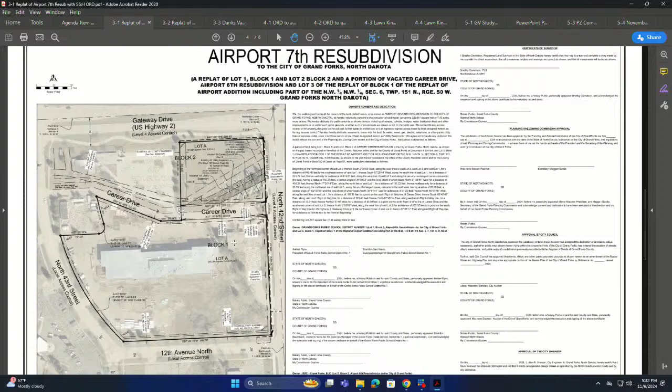All right, Mr. Budke. Yeah, I would just request recusal on this item, number 3-1 and 3-3. In both cases, my employer is the architect of record. Okay, Mr. Reichert. So moved. All right, a bunch of seconds. All those in favor? Aye. All right, Mr. Budke, you are recused. Thank you very much. All right, any more questions for Ms. Grasser? I do have a public hearing.

With that, I'll open up the public hearing. Anybody in the audience like to step up and address 3-1, please do so at this time. Seeing no one, I'll close the public hearing, bring it back to the commission. Mr. Reichert. Move approval. Moved by Mr. Reichert. Second. Second by Ms. Arel. Any further discussion? No hands. All those in favor signify by saying aye. Aye. Opposed, same sign. All right, 3-1 passes.

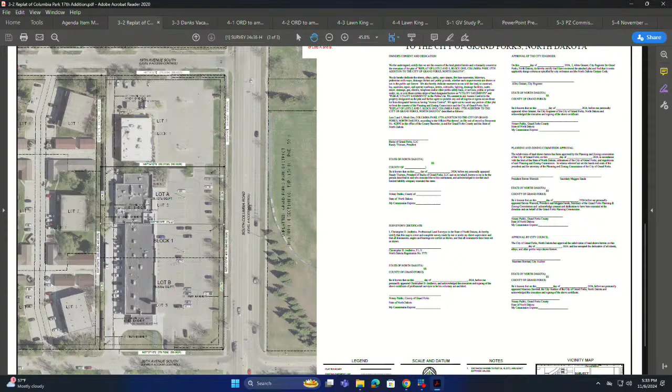With that, I guess I'll open the public hearing. Anybody in the audience want to step up and address 3-2, do so at this time. Seeing no one, close the public hearing, bring it back to the commission. Mr. Reichert. Move approval. Moved by Mr. Reichert, second by Ms. Sandy. Any further discussion? Seeing no hands, all those in favor signify by saying aye. Aye. Opposed, same sign. 3-2 passes. 3-3.

3-3 vacation of right-of-way and easements on lots 7, 8, 9, 10, 11, and 12, Block 1, Danks 2nd Resubdivision, located at 1450 to 1660 South 42nd Street. Ms. Johnson. Thank you. So this request consists of 6 different vacations, one for right-of-way, the rest for utility easements on or near the future site of the Altru Sports Complex, which is to be located along South 42nd Street, right south of the Alerus Center. The vacations are requested to allow for the development of the complex, which will also involve replat requests coming probably first for preliminary review in December.

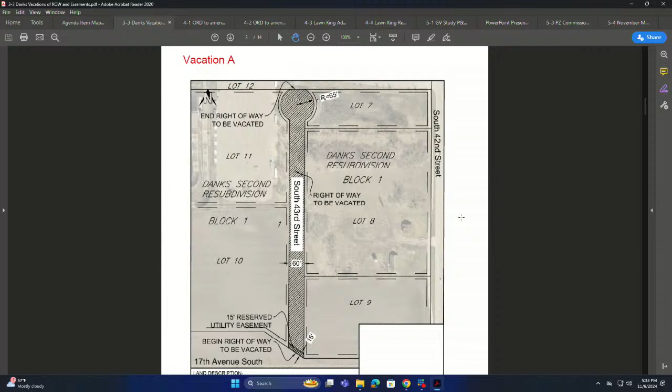We're requesting the vacations ahead of the plat just because of the longer noticing period for vacations. And with that plat that's intended to come next month, necessary easements will be reestablished. So I have ordered these vacations A through F, and I'll just go through the exhibits here. So first, vacation A is for the right-of-way for South 43rd Street. This street has not been paved or installed, so just vacating the right-of-way there. After each map is the legal description for each one. So here's the legal description for vacation A.

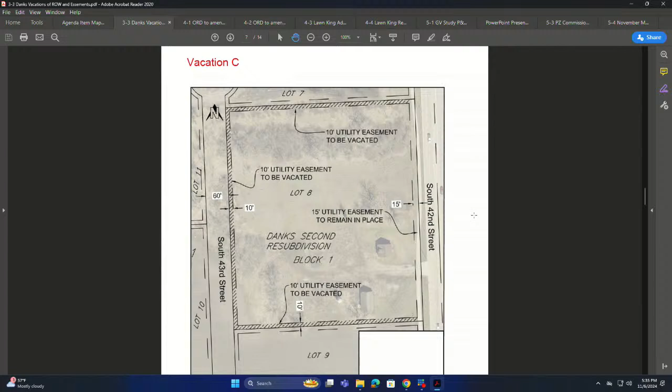Vacation B is for Lot 7, Block 1 of Danks Second Resubdivision. It's for 3 10-foot utility easements, one on the north, one on the west, and one on the south side. Again, the legal description on the second page. Vacation C for Lot 8, Block 1, we also have 3 10-foot utility easements on the north, west and south sides.

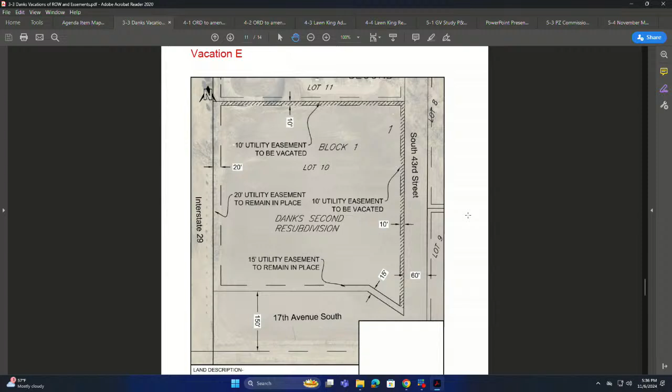Vacation D on Lot 9, Block 1, two 10-foot utility easements vacated, one on the north and one on the west side. Vacation E for Lot 10, Block 1 of Danks Second. We have, again, two 10-foot utility easements, one on the north side, one on the east side.

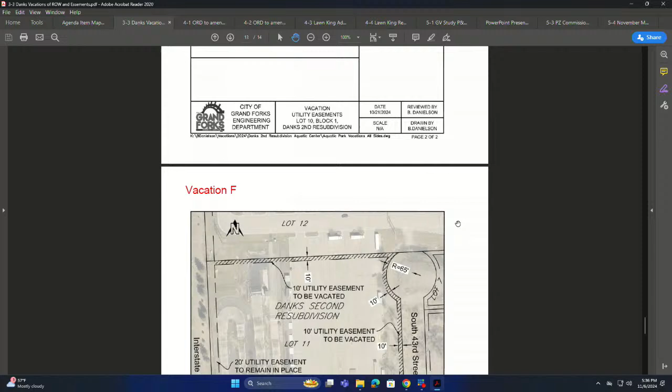And finally, vacation F on Lot 11, Block 1, we have three 10-foot utility easements on the north, east, and south sides. Yeah, those are all 6 of the vacations as part of one request. We kind of just consolidated them all since they're all in the same area. And with that, I'll stand for any questions.

Mr. Akert? Are there no utilities going to that BMX track on Lot 11, Block 1? They're all coming from the north. So we don't need any? Not at this time, but we will be reestablishing because there's going to be another spine coming through that you'll see next month. All right, thank you.

Mr. Mattson? Yes, just to disclose, I am working as the project executive building the Altru Sports Complex, so may need to be recused on this if you feel that way. Okay. No. You're fine. Yeah, you're fine on this.

Okay, with that, I will open the public hearing. Anybody in the audience like to step up and address 3-3, please do so at this time. Seeing no one, I'll close the public hearing, bring it back to the commission. Mr. Reichert. Move approval. Moved by Mr. Reichert. Second. Second by Ms. Sandy. Any further discussion? Seeing no hands, all those in favor signify by saying aye. Aye. Opposed, same sign. 3-3 passes unanimously.

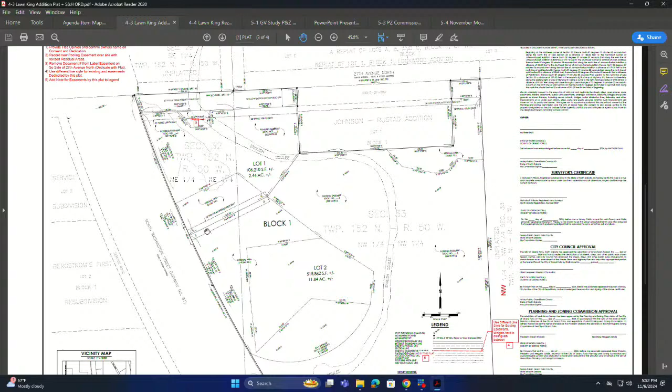Any questions for Ms. Grasser? If you've ever seen that lot, they have a lot to do. They've been working on it. I drive by it every day. Yeah. Mr. Reichert? Move approval. Second by Ms. Sandy. Any further discussion? Seeing no hands, all those in favor signify by saying aye. Aye. Opposed, same sign. Motion passes.

4-4. 4-4, ordinance to amend zoning map rezoning from A1 Agriculture Preservation District to I2 Heavy Industrial for lots 1 and 2, Block 1, Lawn King Addition, located at 2500 to 2600 North Washington Street. Ms. Grasser? So going along with that plat, here are the two lots highlighted. They're looking to go from A1 to heavy industrial. That kind of matches their surrounding in purple here. They will maintain their office shop at the buildings. It'll be in 3 phases, but the original building in phase 1 will be their business shop and offices.

So that fits within the I2. And then they'll add storage in their phase 2 on top of that. But they'll maintain an entrance off of North Washington and have their shop there. And the notices to neighbors will go out after preliminary approval, and that would be 800 feet around. I'll stand for any questions. All right, any questions? Mr. Budke? So with the rezoning, this piece of property, does anybody know, has it ever been in agricultural production? Or it just looks like it's vacant at the moment, but I think it's always been vacant.

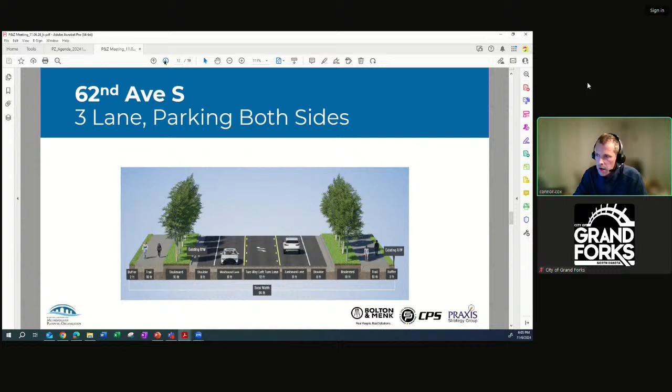I'll also mention that we're just showing you what we call a typical cross-section. It's just basically a slice of what the roadway design could look like. In addition to this, we're developing conceptual layouts. So that's more of a kind of 2D, plan view, top-down view of what that whole corridor would look like. So we're doing both of those. That's a little bit hard to share on a PowerPoint presentation. So I'm going to move on to the next priority focus area.

This was, I would say, kind of the second highest priority from the group from our discussion, and that is looking at South Washington Street, basically from 57th Avenue to the south. So as some of you probably know, 57th was sort of the extent of a recent reconstruction, and the section to the south of there remains mostly a 2-lane rural roadway. So we're evaluating a number of different design options, including 2 lanes, 3 lanes, or 4 lanes in this section, and I'll walk through those now.

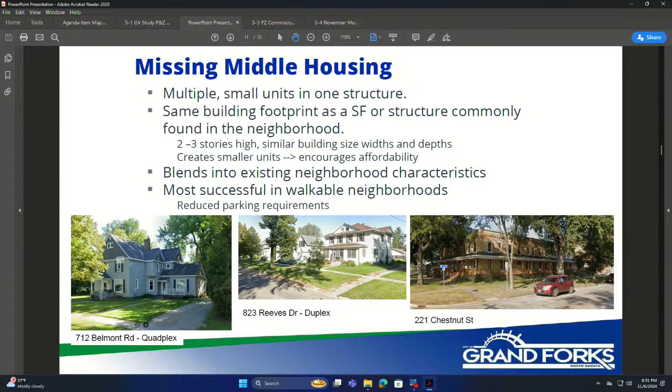AARP North Dakota would be a huge resource for us to tap into. We've had a preliminary conversation with them because they do advocate for missing middle in terms of the aging in place options, ADUs, things like that. North Dakota has an aging population demographic trajectory, and so to try to get ahead of that and start building more senior ready or aging in place things at an affordable rate, they're definitely leading the charge on the advocacy. And so I think there's a handout of this publication on each of your chairs. If there's interest, I'd suggest looking through it.

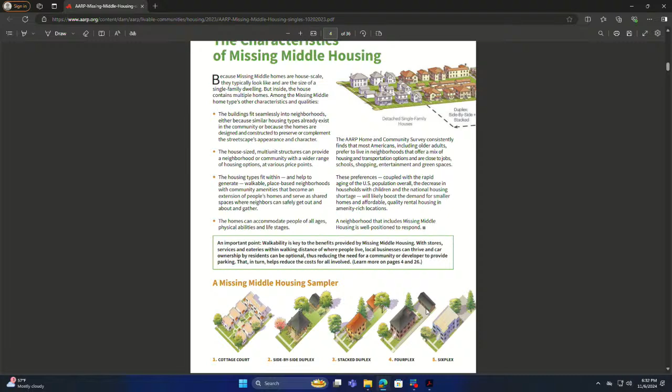I'll just scroll through a couple of different things because they really put together some great examples of what missing middle is and what it could be. And again, it focuses on that house scale that fits physically and aesthetically within an existing neighborhood. This has a great diagram of what those might look like. We don't really have cottage court outside of our townhouse situation, but the sixplex here reminds me of that one on University and 20th, 23rd, something like that. The Harriman Building, I would have never remembered that, but everybody knows the building on University. And so kind of where that missing middle might fit in terms of the scale between single family to large scale apartment complexes.

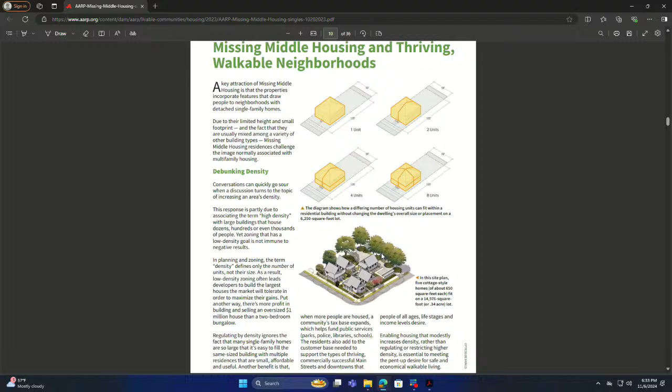It goes through the benefits, again, affordability, reduced transportation because of parking costs, reasons why, as a theme across many cities trying to respond to the housing crisis across the nation. Many are giving reasons as to why they are seeking missing middle and trying to find ways to open up zoning codes to allow them. Distribution of costs, use of existing infrastructure, equity, income empowerment on that affordability level. And so this document goes through some great things that, if there was interest to explore missing middle further, we'd go into a little bit farther. It gets into density, zoning, parking reductions.

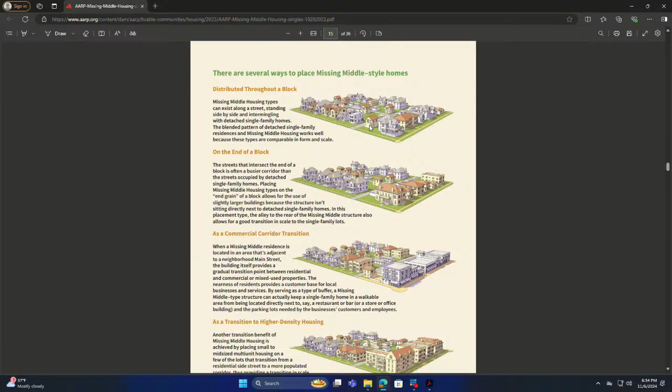There's a great example of a development that shows how you could potentially scatter it through a neighborhood rather than condensing it and having a bigger impact, maybe pushing those larger buildings to the end of a block. If you think of the apartment, I can't remember if it's Belmont Homes, something like 4th and Belmont Avenue, right? There's that brick Belmont apartment complex that's situated on a corner block on a somewhat busy neighborhood street. It fits, it works. It's a good transition on that corner.

But what I was going to show real quick, if I can get there, this one. Just kind of highlighting the difference, the pros and cons, and the different scenarios you can do, whether you prioritize green space, you prioritize parking. There's some different ways to set up a development and try to meet some of that higher affordable goals. So with that, I will jump back to the presentation.

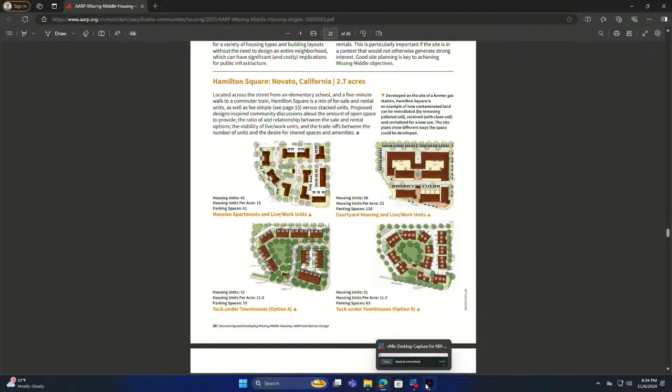Whoops. So we took an evaluation of where missing middle would be allowed by right in Grand Forks. And so the conclusion we came to is 72% of residentially zoned, ballpark number, is zoned for single family detached only. So one unit separated, nothing attached. And then the R2 taking up a large section of the rest of that being a 2-unit maximum.

So our R3 and our R4s, the only neighborhoods that really exist today at a neighborhood scale of R3 and R4 are the near north neighborhood and the near south side neighborhood. Near south side being north of 4th Avenue South, the traditional historic near south side district; south of 4th Avenue is in R2. That's where your kind of Reeves Drive and things are. But if you think about the near south side and the near north, that would be the missing middle that kind of existed prior to zoning codes and things like that. So there really isn't anywhere by right today we could pursue something like that.

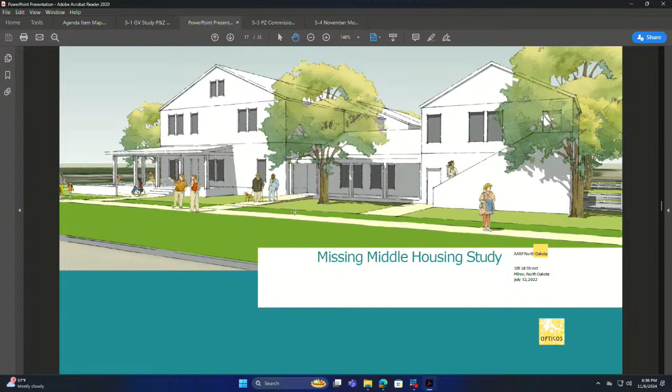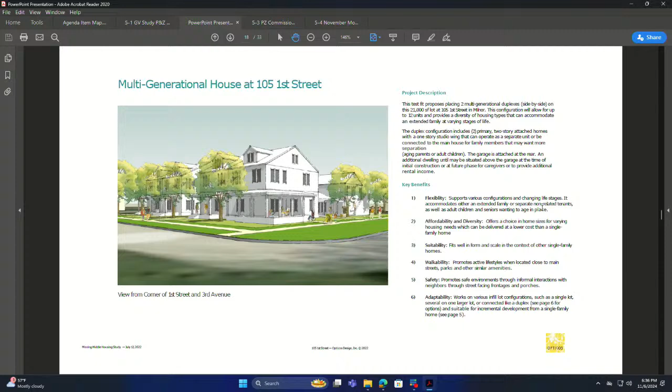So then we can get into the lot test, and I'll just quickly run through. AARP, again, a good resource for the state, partnered with the Department of Commerce for this Milnor example. Milnor being southeast North Dakota area. And so the goal was to try to develop different solutions that would allow for changing lifestyles, extended families, separated, non-related tenants, as well as adult children and seniors wanting to age in place.

And so this kind of steps through, they had a 21,000 square foot lot, and they were wondering how they could add density at a neighborhood level. And so they get the primary unit in front, a completely separate studio wing, and if there was interest, an ADU above the garage, though not all of them have an ADU above the garage in order to meet parking counts. And so combined, you're looking at 12 units on a 150-foot frontage. So a good example of what can be done.

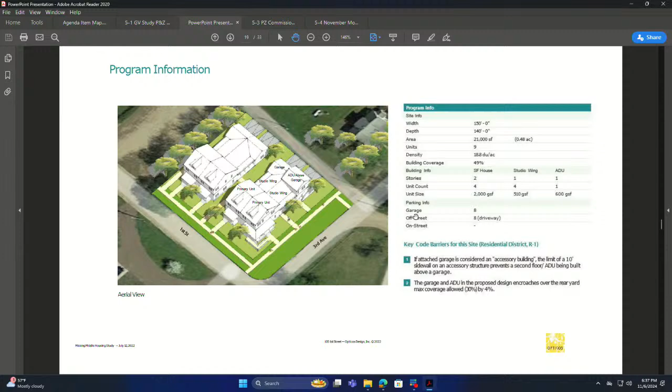But again, getting into the walkability distance for what I assume is Milner's downtown. I'll admit I've never been there.

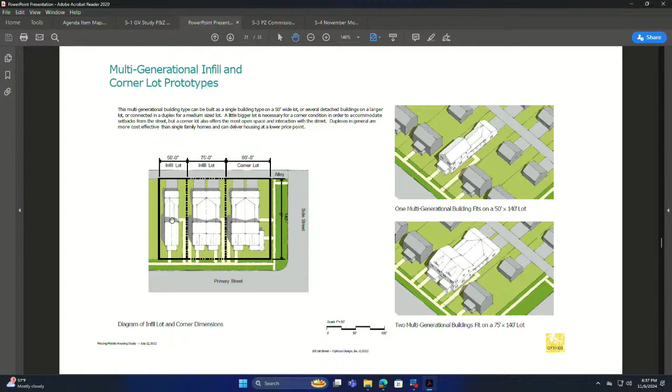This one was kind of the key takeaway for me, in that it's the traditional 50 by 140 lot, which is what we typically see in what I would call our walkable neighborhoods, and what could potentially fit. So really that 5-plex can't really fit on a 50 by 140, but a main unit, a studio, ADU or not, could certainly fit, and it kind of shows how those different accesses to the units would interact with the street and the sidewalk.

And again, just that concept of that incremental allowance of, someone buys the home to begin with, they want to move mother-in-law in, do the studio wing, and then potentially maybe do an ADU. And so it's that allowance of an incremental increase to the lot to achieve some different housing opportunities and housing choice.

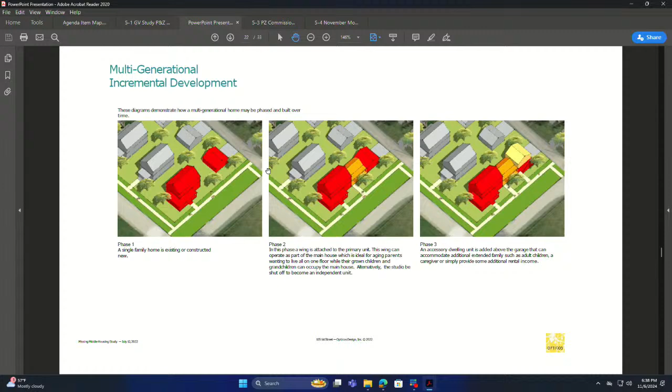So then we got into our lot tests on the Grand Forks level in terms of what our existing R1, R2, R3, and R4 zoning codes would permit. And so this would be the R1 test. This is a single-family owner-occupied property that's a 3,000 square foot lot, 50 by 60. And so owner occupied today, persons gaining equity and all those things that come with property ownership. But the minimum lot size isn't met with this one.

The R1 district has a minimum lot size of 7,500 square feet, which would be about a 53 or a 54. Ryan will tell me my math's bad, but it's larger than your standard 50 by 140, even as far as a minimum lot size for our R1 requirements to date. We have varied that in recent PUDs and in other areas, but if we look at a true review of what our R1 says, we're supposed to be falling to that 7,500. We do have a non-conforming section of code that says any lots in existence prior to 2006 are considered buildable at 3,500 square feet.

So this lot, being smaller than that, would say it's a non-buildable lot. It came up as an issue back in 2021 because the homeowner was trying to sell it, refinance it, whatever, right? And the banks want to ensure that if they're putting a mortgage on a property, they can insure it. You can't insure a non-buildable lot. And so it went through the variance process to essentially say, yes, it doesn't meet our lot sizes, but we recognize it. It's got an existing structure that works, it functions.

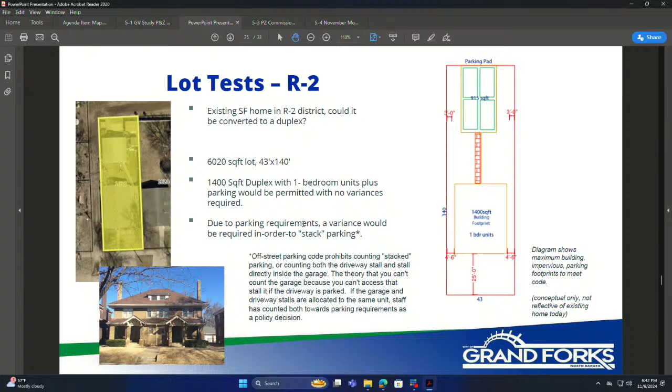If the garage is allocated to a separate unit than the driveway stall, no go, don't pass go, can't do it, right? Because then 2 units would have to interact about parking and that's just not logical. The logical piece, you figure out your parking if somebody parks in front of the other person, is kind of how we've abided by it. But looking at code, it would be something we would look to fix if we ever did an update. So you could do a 1 bedroom.

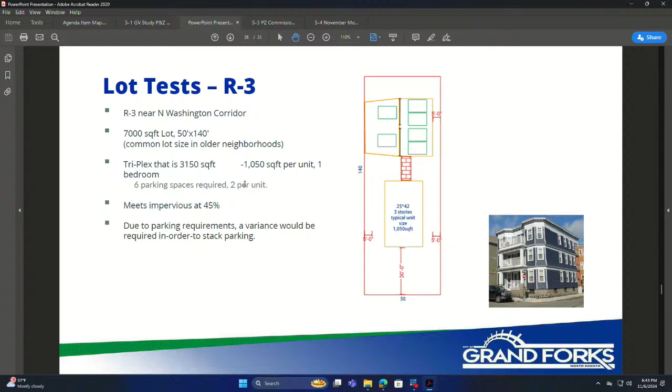The R3, kind of the same configuration, but here we're getting to the 50 by 140. You could do 3 one-bedroom units in order to meet the parking and the impervious. Though again, you have to do that variance for the stack parking for a true review. Again, you can't do 2 bedrooms because that would put you over on your parking counts.

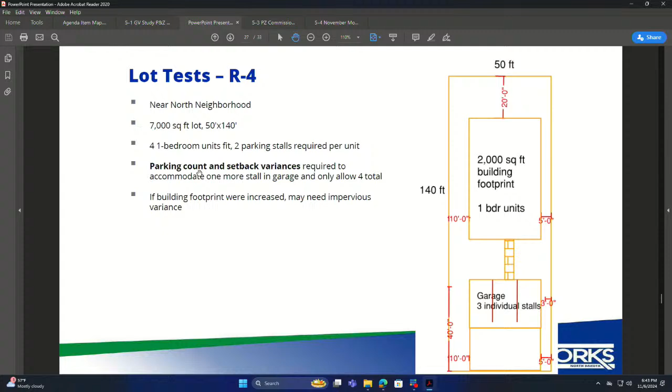Same with the R4. This really should be a 3 one-bedroom unit because we couldn't do 4 for parking. And so you could do 3 one-bedroom units and meet all the standards between parking setbacks, front yard setbacks, accessory setbacks, those types of things. You can meet it, but once you get to the 4-bedroom, the reason a 4-bedroom doesn't work is because, due to setback requirements, you wouldn't be able to add an additional garage and driveway. You would need a variance. So by right, you could only do a 3 one-bedroom.

So upon the review of those lot tests, really, you can only do 1-bedroom units. We've had some different requests for 2 bedrooms and we just configuratively can't make it work. A couple have gone to the variance board to try to see if they could get something passed. I believe the one I know of has failed due to neighborhood feedback. And so the biggest hurdles here would be the parking requirements, limiting those number of bedrooms, because our parking falls to number of bedrooms, not number of units.

And then the other barrier, so parking requirements being the main barrier, and then where folks could do this by right. You could change the zoning code all day and all night, but if you don't have a zoning district for somebody to build in, there's nowhere to actually build it. So those would be the biggest hurdles we identified with the lot tests. AARP goes even a step further and does a land development code audit. Mandan recently did one. And so there's some different opportunities we could continue to pursue if there's interest.

Do you want me to keep going to ADUs? Do you want to talk about missing middle? Keep going. Okay.

So then the ADU, which falls right in line with the missing middle in terms of that incremental or different housing choice, would be that small residence. This one being more so focused in the single-family detached districts to allow something smaller, accessory, to coincide with that main housing structure. The theory there being that if you have a single family in an R2 district, you can already by right add 2 units if you had an interest. You just couldn't take a duplex and make it a triplex in an R2 district.

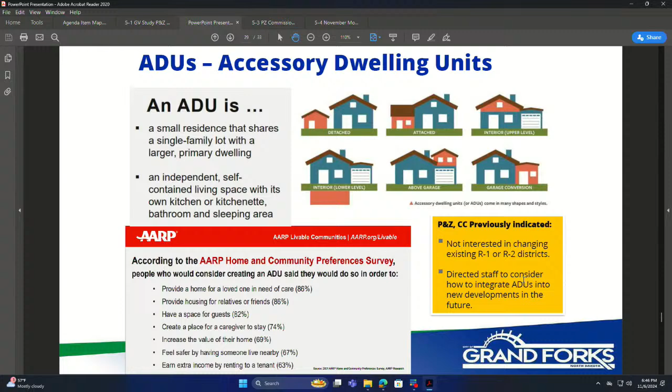Last time we talked about ADUs, it was in response to a duplex requesting to go to a triplex essentially on the lot. And so the feedback there was not interested in adding that extra density and directed staff to look at new development. So if that conversation's changed, certainly welcome that and would, along with that missing middle conversation, look to how we can do that. But the major barrier with an ADU probably is parking requirements again, and things like that.

I would say we have had a request for an ADU. The main house was on one side of the lot, the garage on the other, and they wanted to add an independent unit behind the garage that you would access through the garage, but it would be completely independent of the main structure outside that garage connection. We would say that's independent because the garage is accessory. The feedback back to this property owner was that, nope, that's an ADU. Little interest, because this was a month after we had that ADU discussion. No interest in pursuing that.

The reason being it was for a mother-in-law that was going through some medical care and they wanted her to be on the property. And so what he had to do instead was attach it to his house, and then the access to the kitchen. And so there really is no logical way to separate that unit off in the future. The point I make there is that we do have an interest in that housing type and trying to respond to that generational request. So it's not necessarily staff just saying, hey, we went to a conference and this is a great idea. It's responding to some requests that we have gotten.

And then the final thing was the building code cost implications. You guys asked what's the true difference between the residential code and the building code. I really struggled to come up with hard numbers for you because it's more of a legislative and policy decision at this point, and the general pushback between safety concerns and whether we've overregulated. I've heard 4 to 6 units going from the commercial building code to the residential code, with the desire being that your single-family attached builders operate in the residential code, and there's a lot of capacity for those contractors.